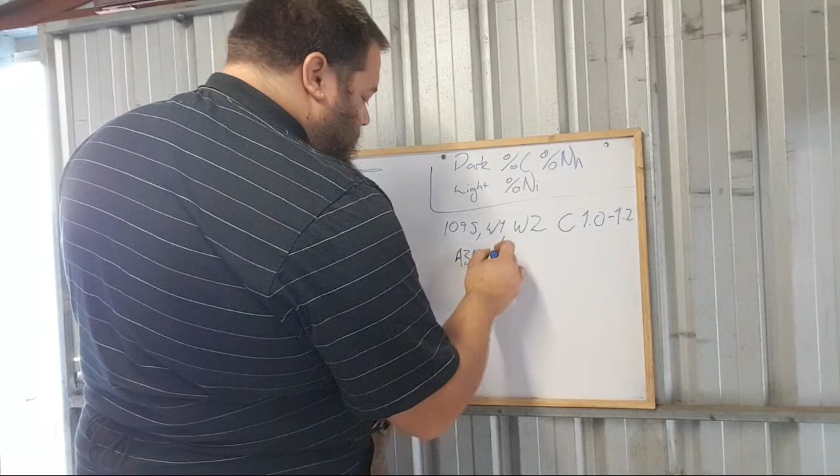Mild steel, so if we're talking A36 or 1018, we're talking about a carbon content of 0.2, or 0.15 to 0.29, well below the hardenability area. So most steels, it is recognized in metallurgical circles that any steel below 0.4% carbon is not what we would call traditionally hardenable. Whether or not they have carbon in solution that can be transferred into martensite doesn't really matter, because the appreciable hardness will not increase across the entire cross-section of material if the percentage of carbon is below 0.4%.

So when you forge, if you've got your file steel, I'm just going to make some teeth in this file steel. I'm going to sandwich that with some mild steel. Let's say we're making a 4-layer billet, so I'm going to make some teeth, and a mild steel bar. Okay, so if this is our billet, our very poorly drawn Damascus billet.

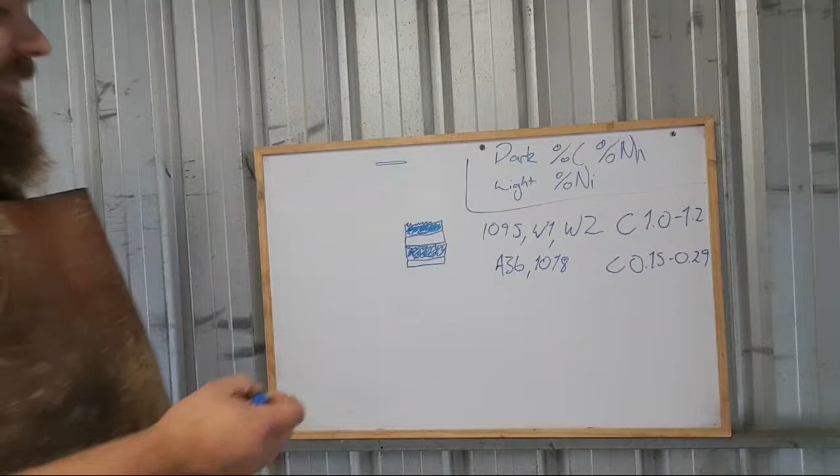So what's going to end up happening is that as we change the cross section, as we forge down on this, the file steel will maintain its rectangular cross section, but the mild steel is going to mushroom out. And so you can see, this is our file steel. And the same thing happens if you use wrought iron in the place of mild steel, especially wrought iron, because wrought iron is very, very soft. So what ends up happening is you have mushrooming, and if you were to turn that 90 degrees and forge it flush, what would end up happening is you'd have your file steel.

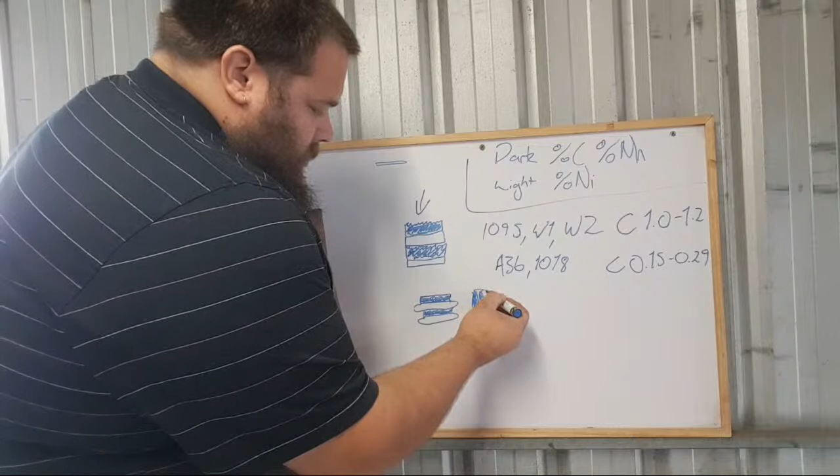So this is your file steel, and then the mushrooming would actually coat the file steel, the mushrooming coming out of the mild steel. And not only that, but you would notice that the mild steel would become much thinner, much faster than your file steel.

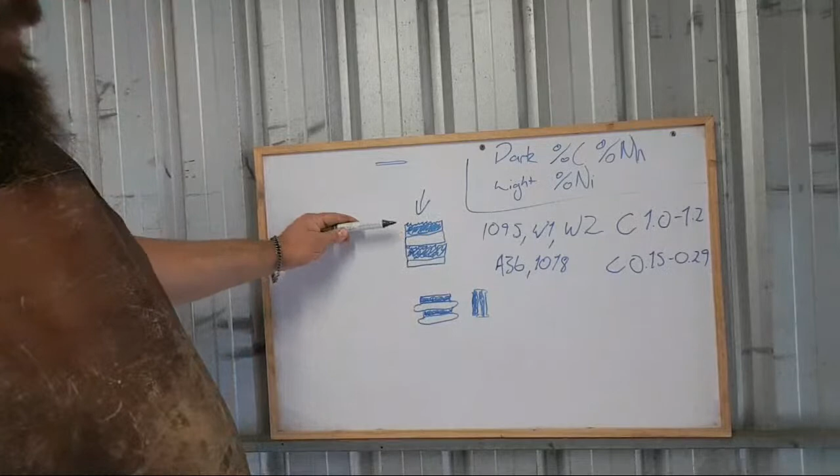So in this case, you'd end up with - if you had equal thicknesses, make believe that these are similar thicknesses - then the file steel would maintain its size while the mild steel squished down. So you'd end up with very, very thin light layers and very, very thick dark layers, purely because the steel is going to move at different rates.

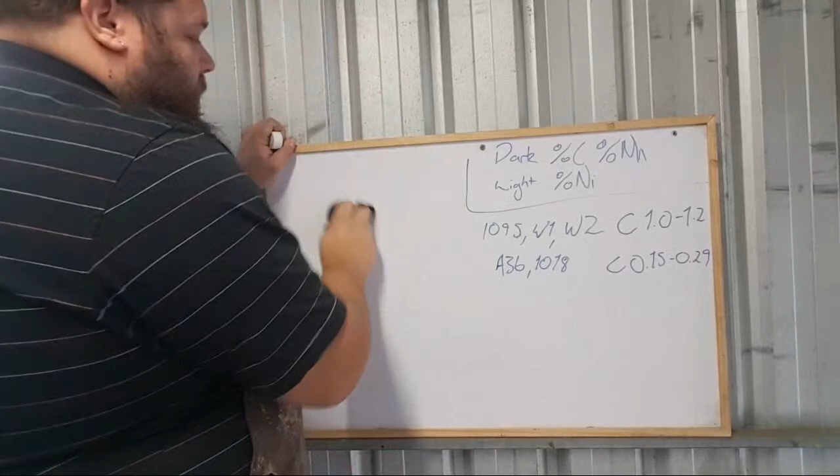So it's important to keep in mind when forging Damascus that you're using chemically similar materials, or if you're not, to keep in mind that they're going to move at very different rates dependent on their carbon content, because the higher the carbon content, the slower they'll move. And then there's also things like the higher the chromium content, the slower they'll move.

As my friend Alex recently found out, 52100, because it is relatively high chromium and incredibly high carbon, moves much slower under the hammer than any other steel he's ever worked with. It's seriously hard stuff under the hammer. So it's really important for you to keep that in mind when you come to forge something. That's why 52100 makes a really good Sanmai, because the central core doesn't move, so it's a lot easier to get the whole thing put together right.

I'm just going to put another screw in this. It's really annoying me.

Now it ain't going nowhere. So yeah, once you've established that you've got your light and dark materials, let's say that we're using 15N20 and 1084.

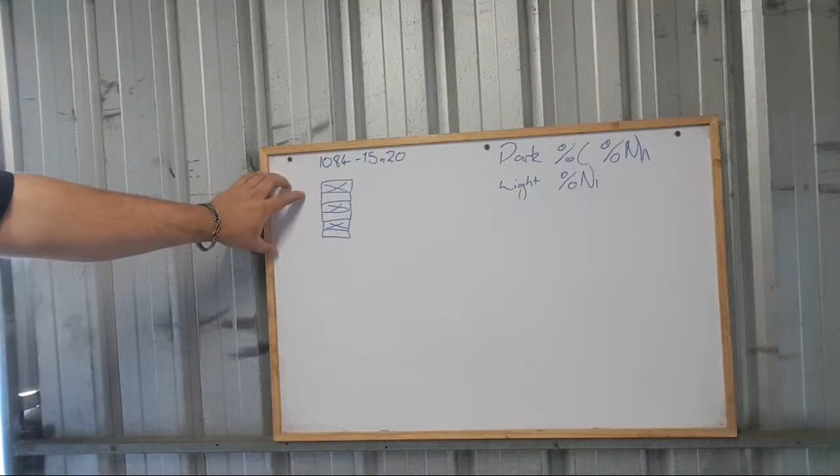So if we were to make a billet, let's say of 1084 and 15N20, so high nickel, high carbon, 1084 being a high manganese steel as well. And we were to layer that up, 6 layers, about equal. 1, 2, 3, 4, 5, 6. The ones with the X in it are high carbon steel. So we've got 1084, 15N20, 1084, 15N20, 1084, 15N20. If we were to forge weld that, now this isn't a forge welding how-to.

I might do one of those in the future, and I'll do that whilst making a billet because I think it'll be easier to explain a lot of the concepts surrounding what happens in the forge weld in that instance. But we're going to take for granted that we can just forge weld anything together we want, and we're going to forge weld these together. We're going to squat them down a little bit, and we're going to create a square. So we're going to create a billet that is, this is a terrible square, but it's going to have 6 pieces, 2, 3, 4, 5, 6. So we've forged it down, we've got our square billet.

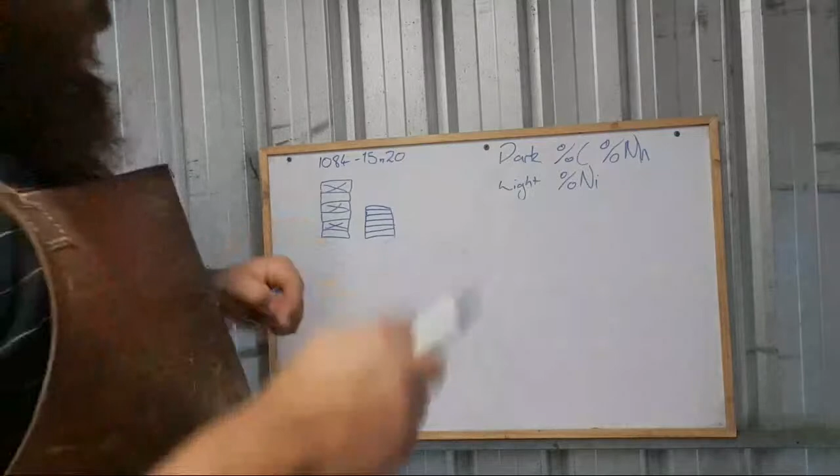Now this is what we would call straight layer or random pattern Damascus. Random pattern can be a pattern that's forged in with the dies and stuff like that to make a random assortment of compressions. But I would still call that patterned Damascus rather than random pattern.

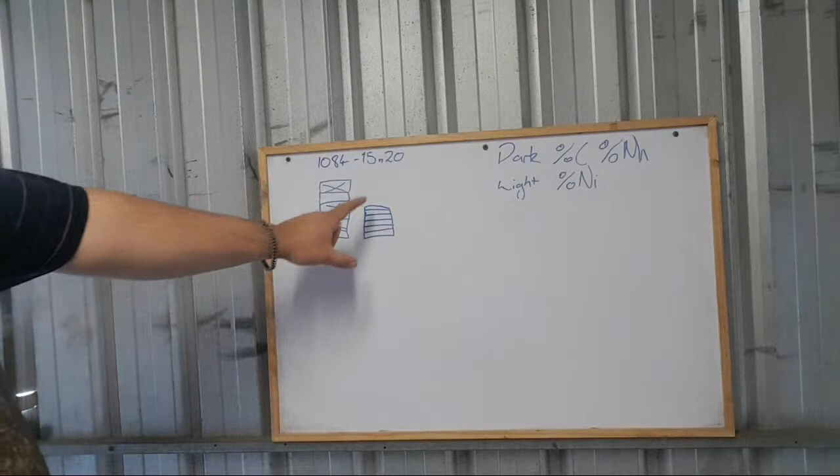So if we have a square billet of Damascus, which is really important for the next step, if we're going to make mosaic Damascus, we want to make something that is going to be tiled and put on edge to show like an explosion. Let's go into an explosion pattern, because this is basically what I'm leading Sean to.

Hey Bobby, Aaron Finn, Westhold Forge. File and leaf spring is a very bad idea. Hey Paul Fontanini. Okay, sorry guys, yeah, the chat wasn't working. Thanks, Wiley, thanks for the test.

So, with the Damascus now established, we have our high carbon, low carbon mix, 6 layers. It's a relatively low layer Damascus.

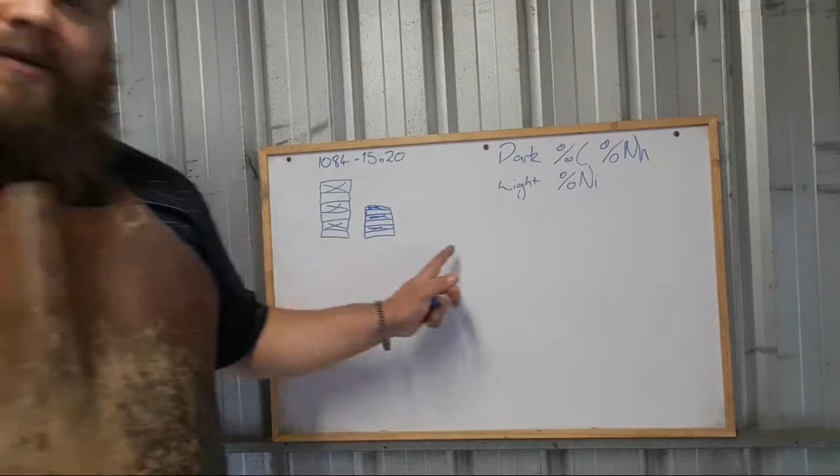All right, Jared, thanks for ducking out, man. Thanks for ducking in, I should say.

If we're going to make W's out of this, which crushed W's is the basis for pretty much every mosaic pattern Damascus. It's not the only start for a mosaic pattern, but it is one of the basic starts. If you're making feather pattern, if you're making explosion pattern, if you're making a lot of other stuff, you're going to want to use crushed W's. But crushed W's are not this straight layer, right?

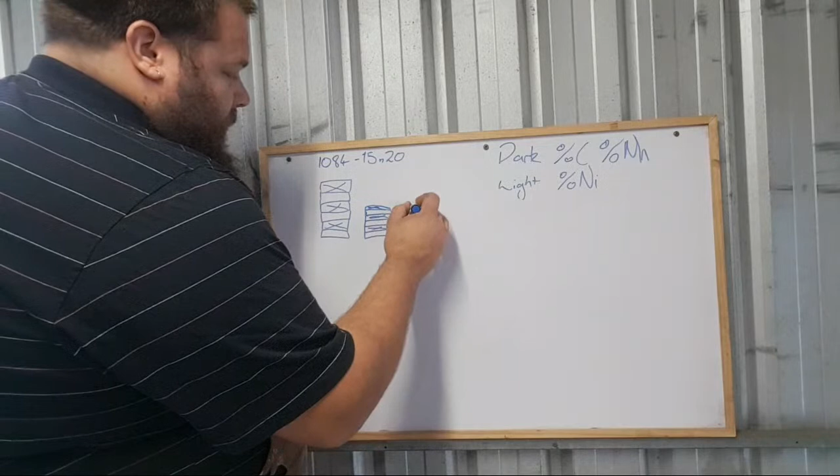If we were to draw this out with the layers running horizontal, what we need to do is turn these onto the 90. But if we're going to turn them onto the 90, we need to first turn them onto the 45. So we're going to make this square like this. This is a diamond, not a square, Sam. You suck.

So we're going to turn it onto the side, and we're going to forge these sides in to create an octagon. Now you're going to watch me make a really shitty octagon, and I'm going to make it way larger than I need to, because drawing an octagon is always fun.

What's going to happen is you're going to actually end up curving these materials like this, and you're going to end up with opposing curves, if that makes sense. I think I put too many lines in there. 1, 2, 3, 4, 5, 6. Yeah, I did. Let's kill that one, and let's just make that a high carbon, low carbon, high carbon, low carbon, high carbon.

Okay, so now we've turned it on its axis and we've forged these in. Those straight layers, when forged on the 45, are going to cup towards the edges. Then when we forge it, rotate it 90 degrees completely and forge it down into a bar cross section, back to like a flat bar like this, what you're going to end up seeing is this.

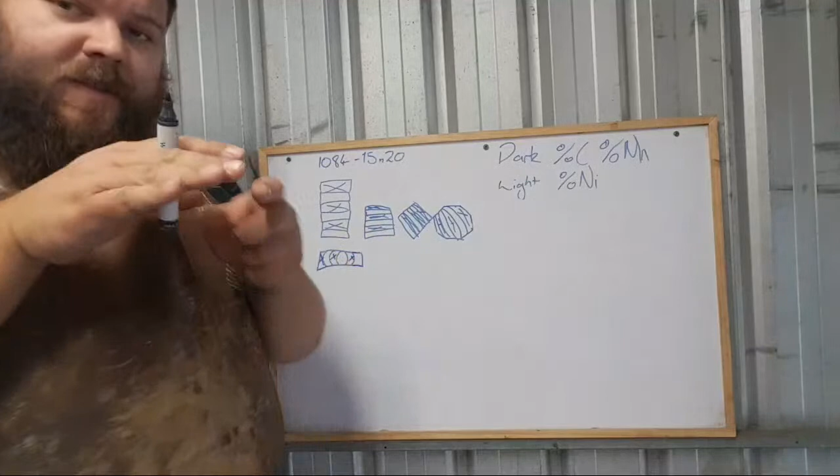Again, I think I drew too many lines in. And so that would be our high carbon, high carbon, high carbon. You see how, because we've cupped the edges in the 45, we now have these kind of C shapes at the ends of the bar. And this is the end of the flat bar we're talking about.

So what we want to then do is, once we've drawn this bar out to, say, 1/8 of an inch or something like that, then what we want to do is then stack this up. So we'd have, let's say, 4 pieces. And each of these, let's say we flipped it. So there's 1, 2, 3.

I'm going to try and match this as much as I can. That's probably a little bit intense. Okay, so we've got our cupped pieces.

What we want to do is etch ends of the bar to see where the pattern is, especially if we've got a low layer even count where there's going to be a high carbon and a low carbon on the outside edges. I'm going to flip it around. So instead of having the high carbon together, we're going to go high carbon, low carbon. You see how that is? So you've got low carbon here, high carbon there.

Thanks, Hans. So yeah, we're going to go high carbon, low carbon, high carbon, low carbon again. And then high carbon, low carbon again here. Did I do that right? Yeah, I did that right. It's fine, I'm just a crappy drawer. So we've got low carbon, high carbon, low carbon, high carbon, high carbon, low carbon, high carbon, low carbon.

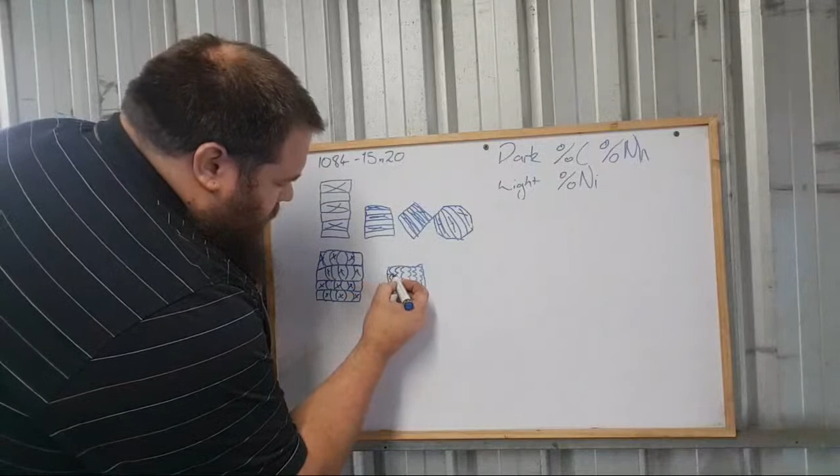And so that's basically what your pattern is going to look like. And that is crushed W's, because if you look closely - if I'm going to draw a blown up view, well, I don't have to, I can just bring you in. Hopefully that's visible. If you look at it side on, you can see W, W, W, W, W, W, W, W.

Damn it, Jim, I'm a bladesmith, I'm not an illustrator. Correct.

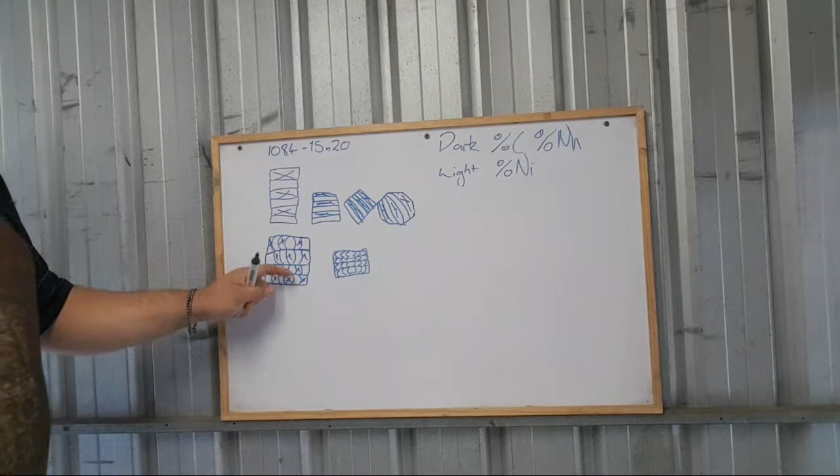So we've gone from straight pattern, turned it 45, forged it into an octagon, turned it 45 again to bring it on edge, and forged the C's, and then stacked the C's and forge welded them together to make crushed W's. Now, the number of crushed W's you have will just depend on the layers. So you could double this again, cut the billet in half and make another layer of W's.

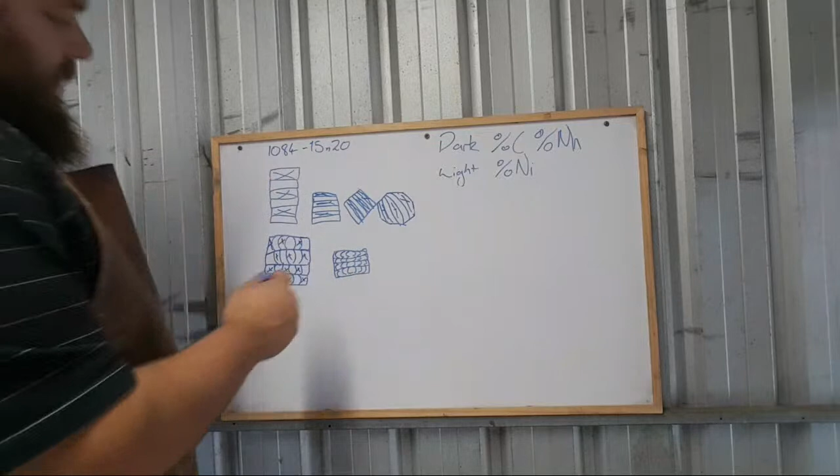And if we were to make a feather pattern, we would take this W billet and drive a wedge, a flat-topped wedge, through the billet to drag those W's down to create those feather-like patterns. But what we're talking about today is not feathers, we're talking about mosaic.

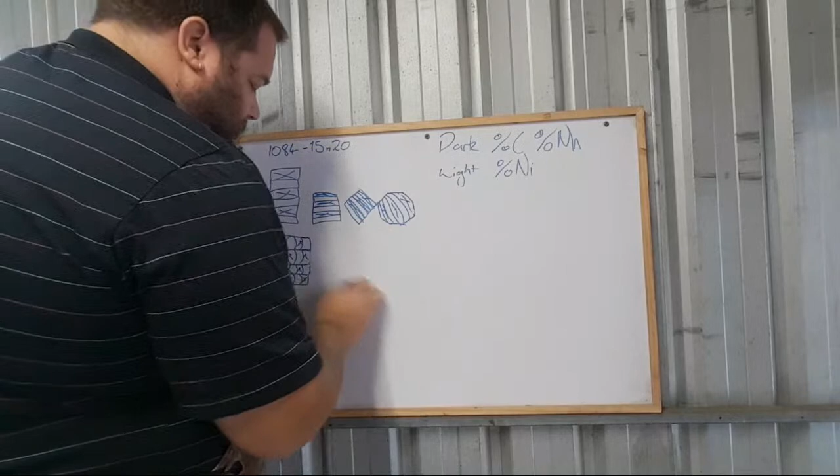So we've already established that W's have been made. Here's our crushed W billet, prepared to be welded. So we weld that up. What we're going to do is exactly the same thing we did here. We're going to forge it on the 45, but in this case, we're going to square it to the 45.

So what we're going to do is turn that billet on its side, or on the diagonal, like this, and we're going to square it to this, so that instead of having the W's running this way, we're going to have the W's running this way. So let's just quickly - whatever. So there's our W's, we've turned them on the 45, and then we re-square it. So then the square becomes this way. Now, what we should have is a square with the W's running like this.

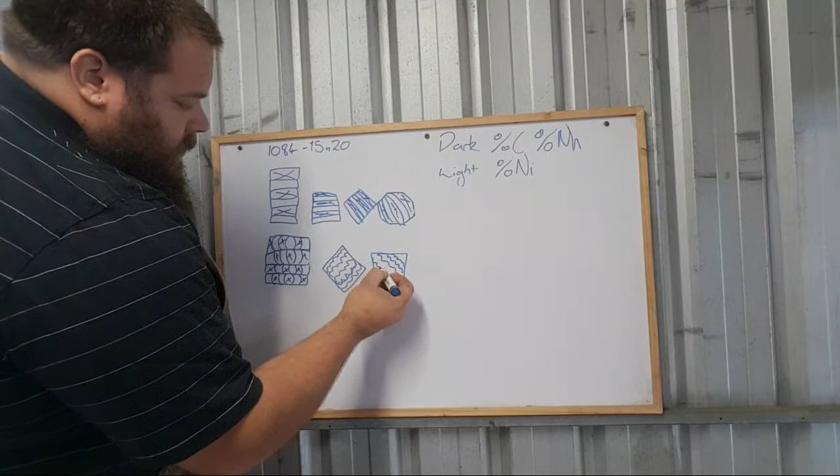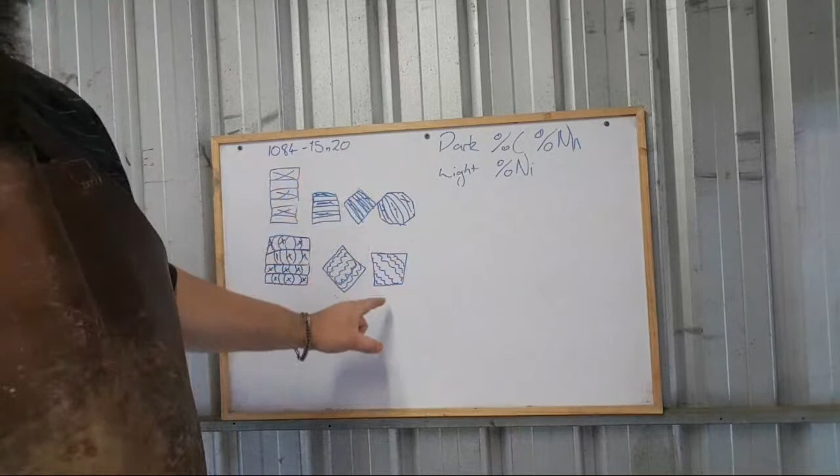So you can see that we've got this kind of lines. Now they will cup slightly, like they did with this forging, but it won't be as dramatic because we've already got the cupping from the W's themselves. So once we forge that, and obviously we wouldn't turn it that way to get this, you see what I mean. But then what we've got is a bar with this being our end pattern.

So what we want to do is cut that bar, hopefully drawing it out to a length. So, say that's the end of our bar. I'm getting fancy here, I'm doing 3D. So that's our square bar, and we have the diagonal W's pattern here.

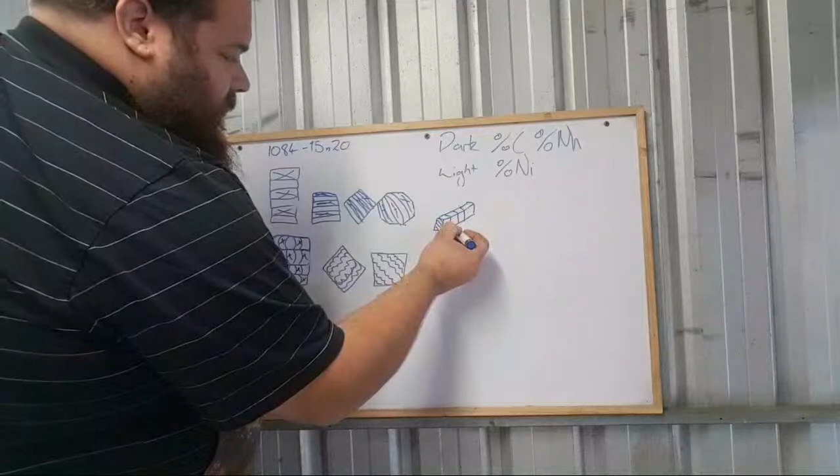What we want to do then is form equal parts, and I know that's not equal, don't challenge me, and then stack them up so that they're in this orientation. Oh my god, that's really not square. Okay, there we go.

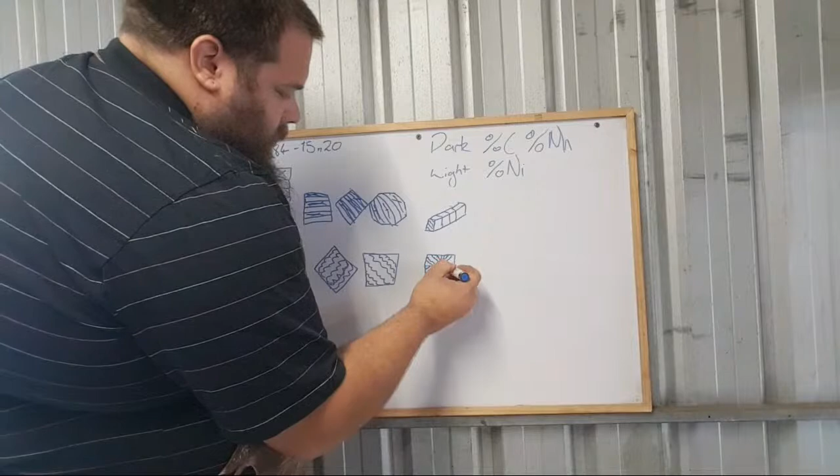Right, so you can see how it's exploding from this. It looks like it's exploding from the center because you have all the lines traveling diagonally outwards. And what you would do is etch the end of each billet to give you the right orientation.

And then you tack weld this up, and you can do it by hand. You need to be working very quick, and you need to forge from both that side and that side. If you have a press, then you can use squaring dies.

So basically you can have two pieces of angle iron on your press dies that create a diamond shape when they're pushed together. You put your billet in there like that and force it all together in one dimension, because that way it'll forge weld all the sides at the same time.

And once you have that, and you've forge welded it, you have the basis for explosion pattern Damascus. Am I making sense so far?

Final photograph, just in case you want to pause it later. Always go back and pause it. I'll leave it up.

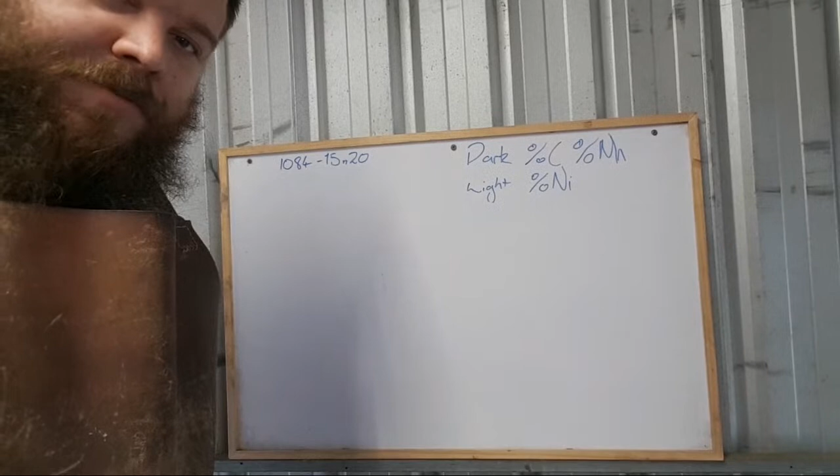So if you want to make just Damascus blades, then you stop at position 1, which was forge welding straight layers together, forging them down into a bar and drawing them out.

Thanks, Shelby. So once we've got our bar, we're going to forge that down into a rectangular cross section. I'm going to make them quite large now, just to show you what I'm talking about. So we're going to forge that explosion pattern down. So it's still our squares, and it's still got our explosion pattern going through it.

And this is how boring it would look if it was straight layers. So you could do straight layers. Keeping them straight after forging them on the 45 is very difficult, but the W's make it much more interesting because it looks like shock waves coming out of an explosion.

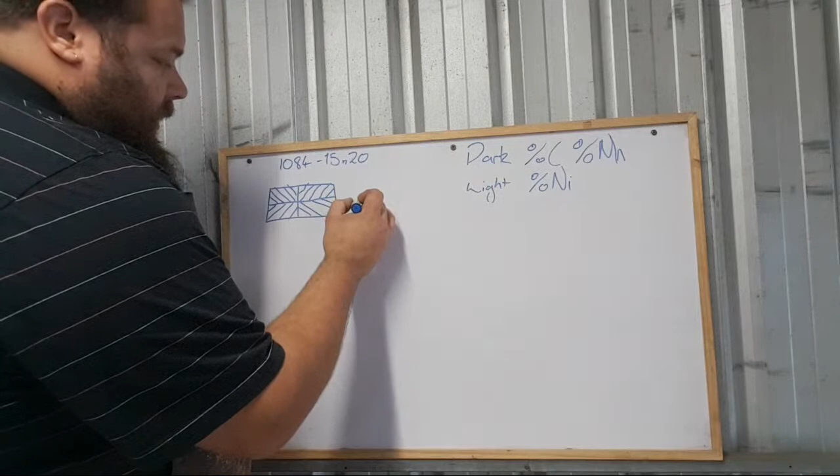So once we have our explosion pattern Damascus, right, we're going to have a long rectangular bar. Again, I'm going to draw in 3D to make my life hard.

What we're going to need to do with this bar is cut it at a 35 degree angle, 33 to 35 degrees. And this is where it becomes really difficult for people who don't have a metal cutting bandsaw or a metal cutting drop saw. If you've got one of those chop saws, it's really useful.

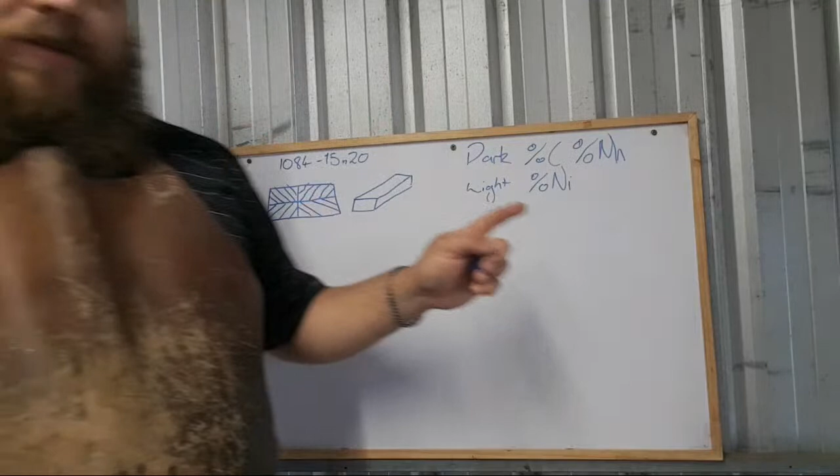If you've got a metal cutting bandsaw, even better. If you don't have either of those things, it is still possible with an angle grinder, and I want to try that one day, but it makes it a lot more difficult. The other thing that is really nice to use for this is a surface grinder or a mill. If you don't have either of those things, it is still possible, it's just a lot harder.

So there are two methods to get from here to having this on the sides of your blade. The first is the ferry flip. So if we are looking at the side of our bar, this is the bar we've got. The end shows the pattern.

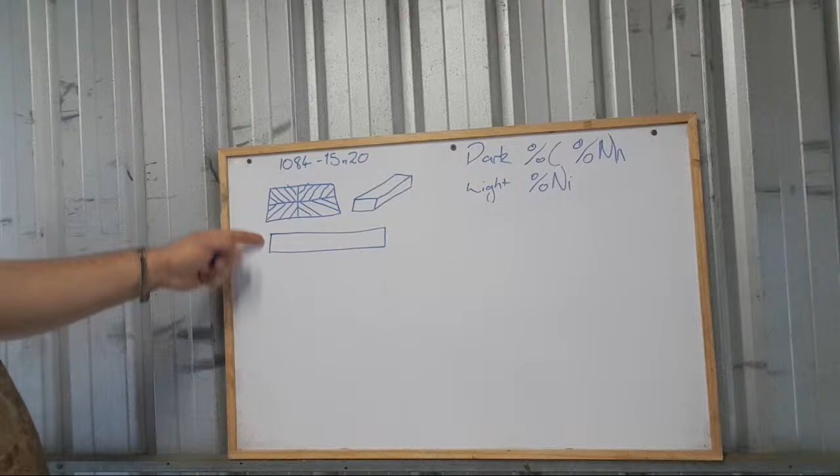So the end, the pattern is here, right? We're going to cut at a 33 to 35 degree angle tiles. I'm going to make multiple cuts, equidistant, try and make them the same size.

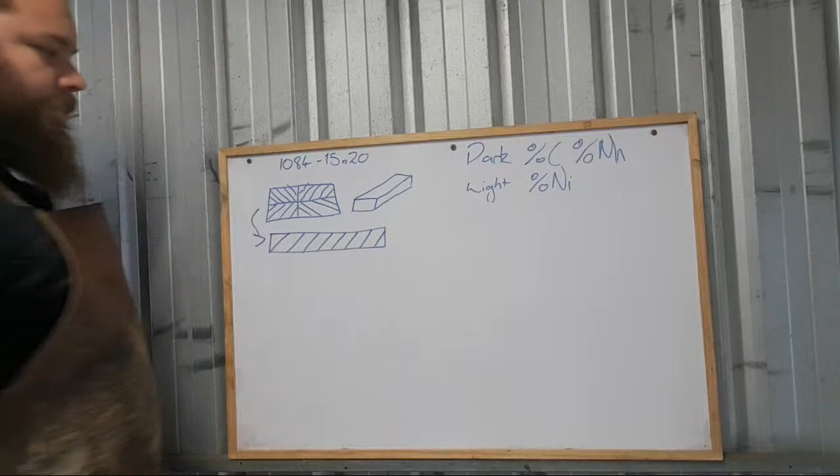And that way, we're going to have this end pattern now being able to be turned this way to make a weld seam.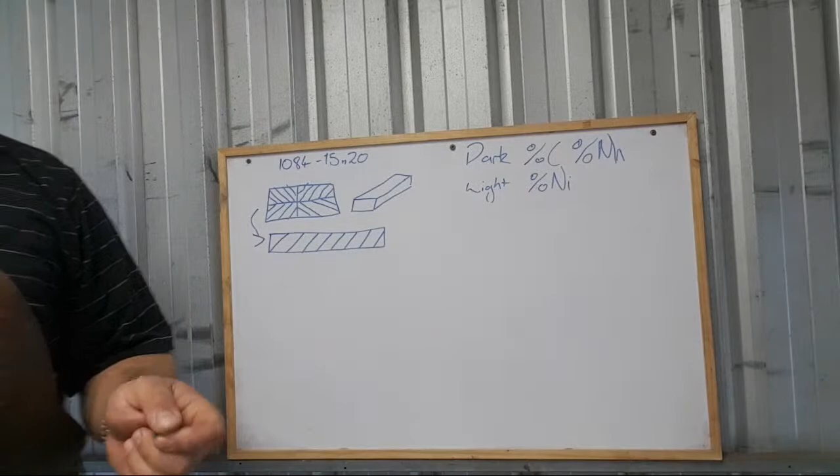Lots lost in kerf, absolutely. Incredibly a lot of loss. And that's why a metal cutting bandsaw is a lot better for this than a drop saw.

Hey, White North. So once we've cut our tiles, you're going to number them 1, 2, 3, 4, 5, 6, 7. Let's say we've got 7 pieces. And we're going to lay them out. We're going to flip one this way, right? So we're going to flip that way and then that way. And then we're going to flip that way and then we're going to flip that way.

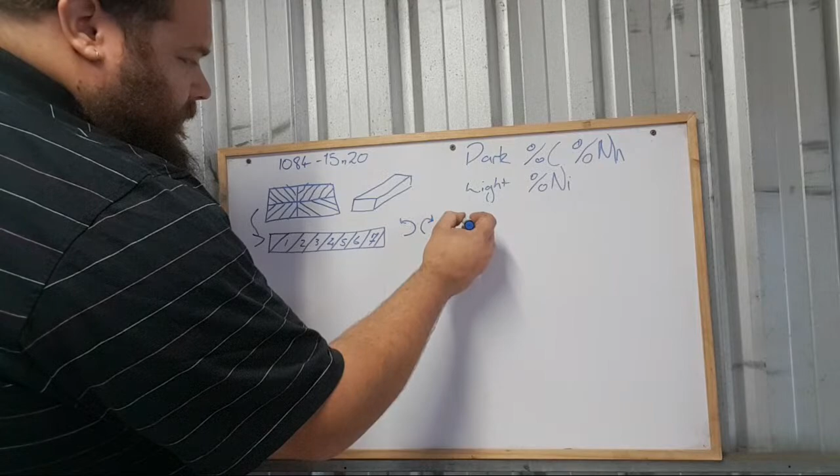And this way, you're going to book match each piece. Kyle does it a really interesting way where he'll go 1, and then 1, 1, 2, etc. like that. And he'll match them that way.

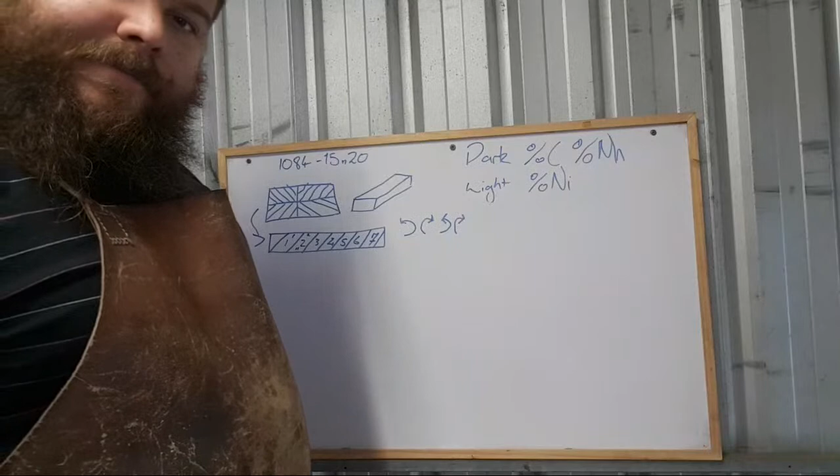Ooh, nice. Milwaukee Portaband and Starrett blades. Very nice.

So you'll flip that one that way, that one that way, that one that way, that one that way, etc., etc., to book match all of the patterning until you have a billet that has a 33-degree angle on it, is straight across, and then there's a 33-degree angle that way. We're going to go 1, 2, 3, 4, 5, 6, 7. And so now what we should have is what was here is now here.

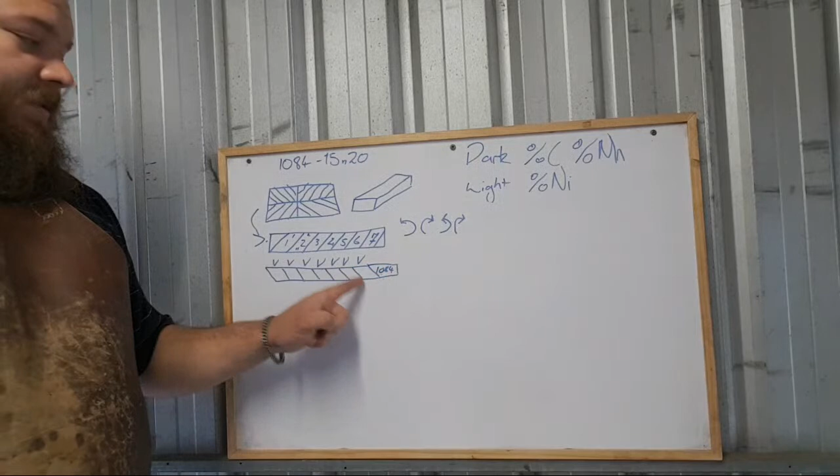And a quick tip, if you're going to do this, is what you can do is make a separate tile back here, one with a square end, out of pure 1084 or 15N20. And that can be your tang, so that you don't lose all of this beautiful mosaic that you just made to your tang. So therefore you have an excess piece of material which is still as hardenable as the rest, but that can be your tang rather than having the pattern disappear into the tang. So the pattern can be all the way along the blade, and you can get a bigger blade out of it as well that way.

So once we've got this, we're going to weld all of the seams. You can do it with a MIG welder, but most people do it with a TIG welder, all of the seams entirely down the entire blade.

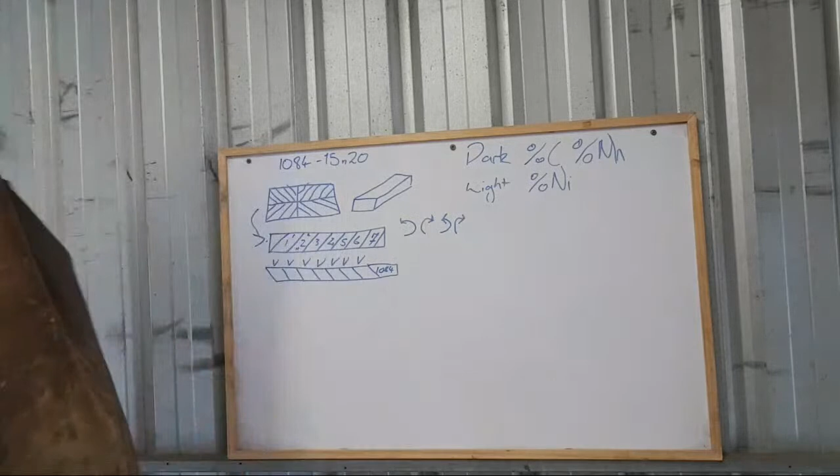You can weld to a bar backing. Some people like to weld all of these to a mild steel bar, like that. And what they do is they clamp them down, weld along the base, and then they weld all the seams anyway. And then you can either weld to that mild steel bar, which normally they do, and then they just grind it off later, or they simply just weld.

They simply paint white out on the bar itself to stop it from welding. But I would prefer to weld to that bar at that stage, because that way I'm guaranteeing that it's going to support that material. So yeah, if you're going to do it this way with the mild steel bar attached, you're going to have less likelihood of shearing these welds in the forging phase.

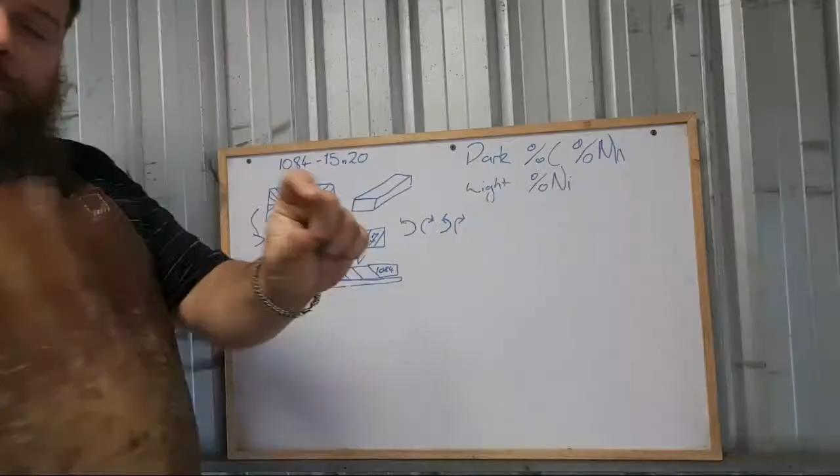And you're only going to want to forge it in this dimension, so make sure you keep it relatively thick. You want to be, I think Kyle Royer has it 3/4 of an inch. His tiles are 3/4 of an inch high, so that would be 3/4 of an inch wide in the cut. You can make it higher, you can make it an inch high. The higher they are, the more welding plane you get, the less likely of shearing. But it'll all depend on how much material you have.

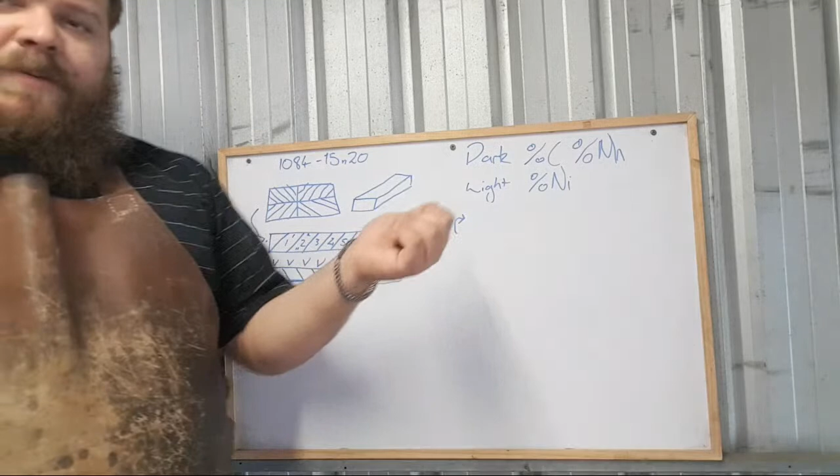Yes, you need to weld all of the seams. It's not a weld that does well with borax, because the flux gets trapped inside these seams, and if the flux gets trapped in those seams, that's it, the weld's gone. Because you're putting a lot of shear stress on this.

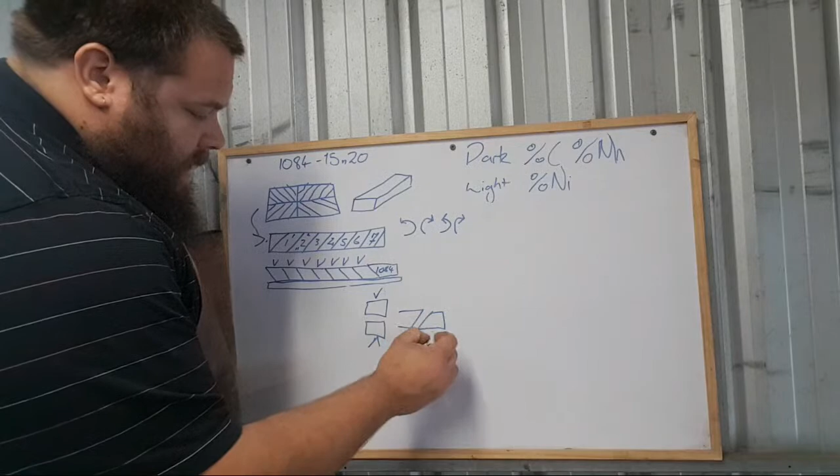In a normal welding plane, you have one piece of material and another piece of material, and the force is directionally this way, right? You're just smashing them together. In this one, you have a piece of material with an angle on it, meeting another piece of material with an angle on it, but the force is still this way. And so what wants to happen is that this one wants to shoot that way, and that one wants to shoot this way. Right, so without having the seams completely welded, A, your shear stress is just going to push them apart.

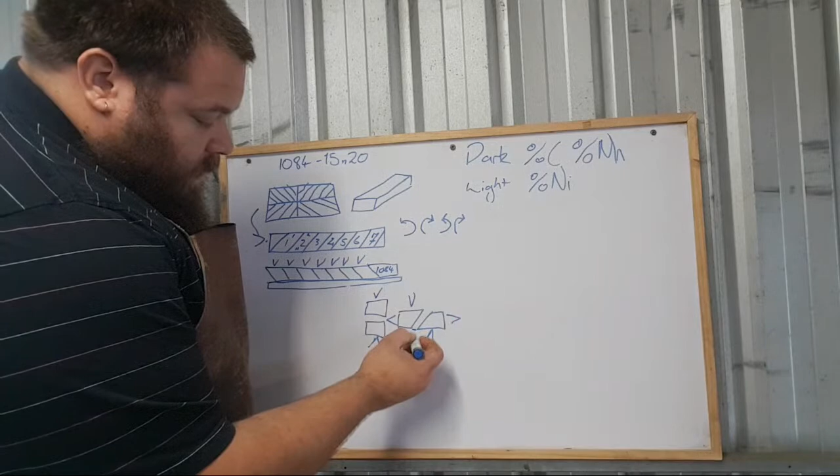And B, any flux that is in here is going to seep into these areas, because what will happen is that as the compression hits, these toes will push apart a little bit and leave you with a seam of borax.

Hey, old wolf, how you going?

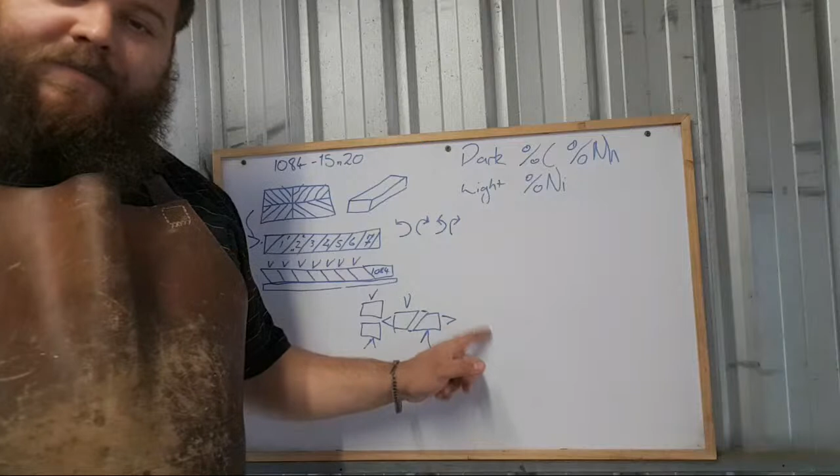So yeah, you definitely need to weld the seams on these kinds of billets. And that's one of the other disadvantages, is then you have to grind out all of the seams, because that weld material is not good for Damascus. But once you've completed that, be back in a second.

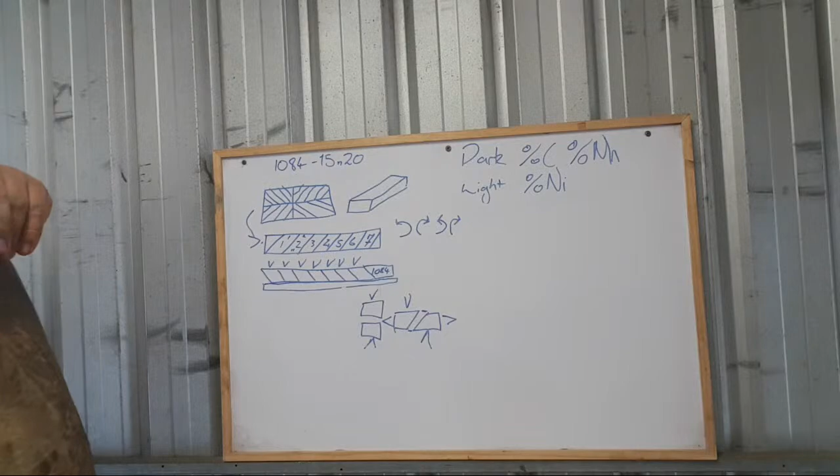So once you've completed that tiling process, and once you've completed all the welding, what you will have is this. So this is explosion pattern Damascus. Hopefully it's clear how those W's make the pattern. And you can see that this has actually been welded onto a piece of 5160 as the tang material rather than a piece of 1084. But 1084 would have been better because 5160 really doesn't like to weld. So yeah, that is the explosion pattern Damascus that we're discussing in this demonstration.

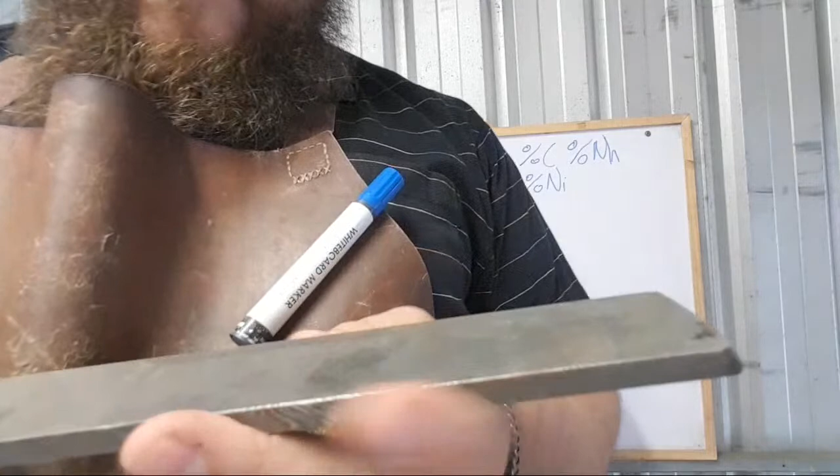Now this is a slight variation on the pattern that I've just been discussing, because this was 4-wayed twice. This has been coffee etched, funnily enough, but it's not hardened, so therefore the contrast isn't very good. That's something to be realized about Damascus, is that the etch doesn't work properly until after the billet is hardened. So that's why people get disappointed when they first trial etch their billets and it doesn't show up as contrasty as what they like.

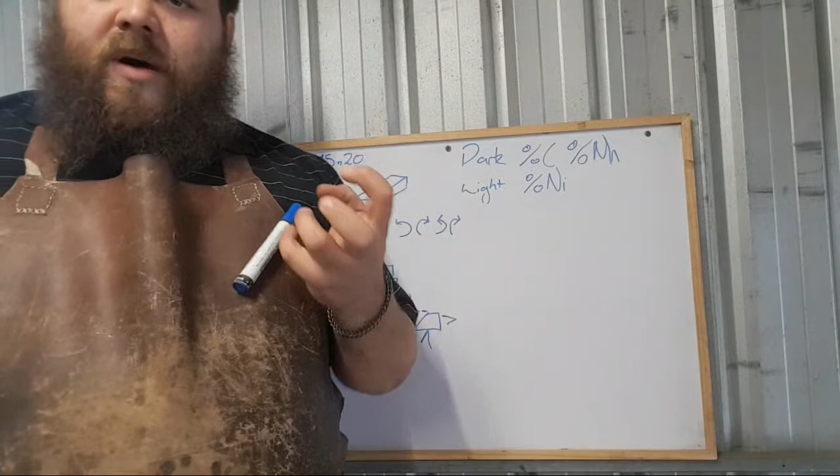So yeah, for those of you who don't know, this billet was actually made by mastersmith Kyle Royer, and what I'm teaching you right now was actually taught to me in a symposium seminar that Kyle did on making mosaic Damascus. So yeah, there's how I know how to do this.

Now, hopefully everyone understands the tiling method.

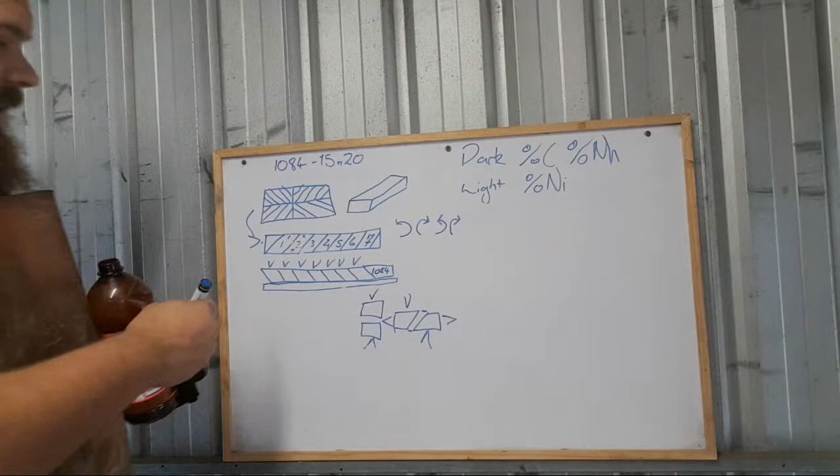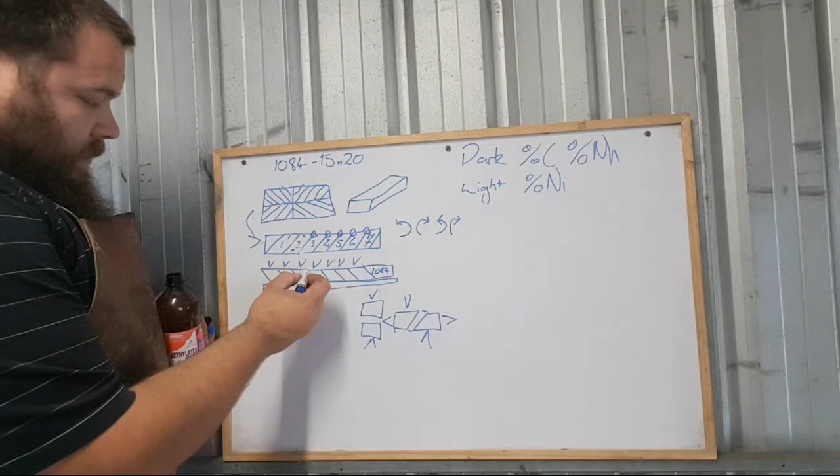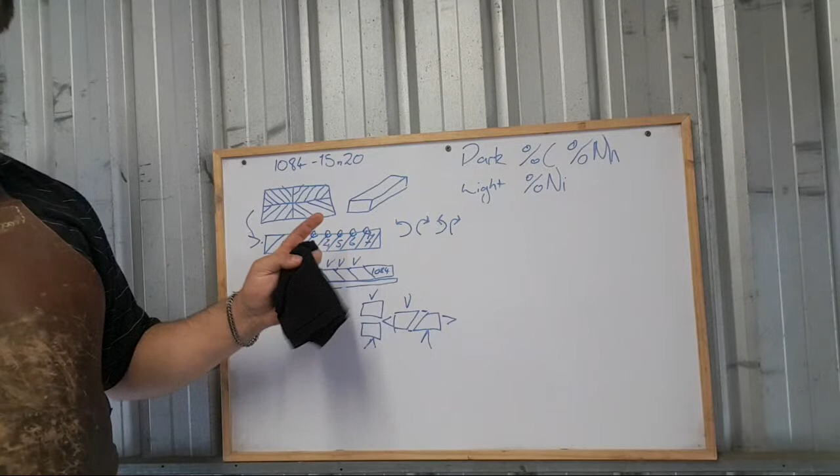Now, hopefully everyone understands the tiling method. This is the method that Kyle uses, and this is the method that most people use. It is sometimes called the Ferry flip or the Felicietti flip. Stephen Felicietti was the man who originally developed this, and he's actually an Australian. He lives in Tasmania, funnily enough. Tom Ferry kind of said that he made up the idea, but he actually didn't. It was Steve Felicietti. And there's been a lot of argument about that. And there are some people in the Australian community that get very upset if you say ferry flip. But either is correct. It is simply tiling, Damascus tiling.

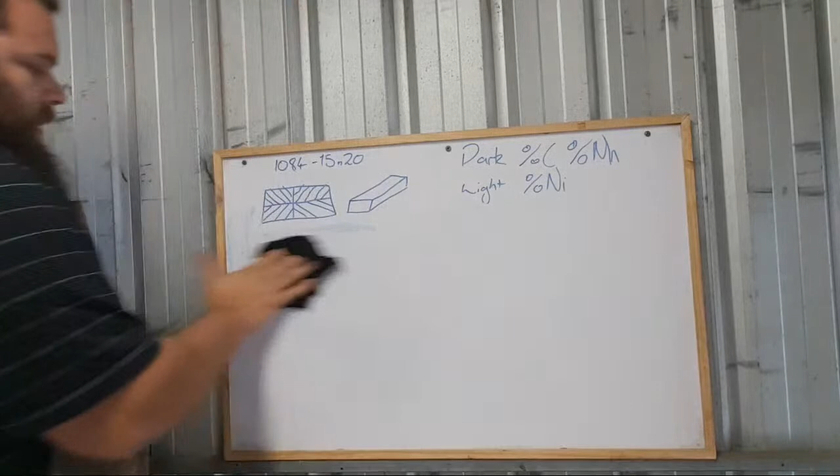So, now, there is a second method, a slightly more dangerous, but also somehow also easier. It puts a lot more stress on your material. And this is known as the accordion cut. Now, a lot of people will know about the accordion cut, and there are two different ways to do the accordion cut, funnily enough. I'm going to show you both.

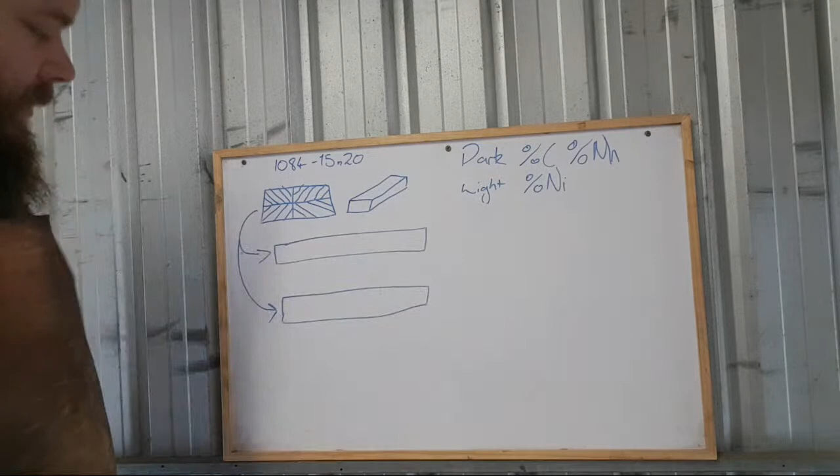So, first accordion cut, we have the same thing. We have our bar, again with the pattern on the end. And I'm going to show you a second bar. And these are both the same bar. They've both got their material with the pattern running in lines this way. All right, so that's the way the pattern is running right now.

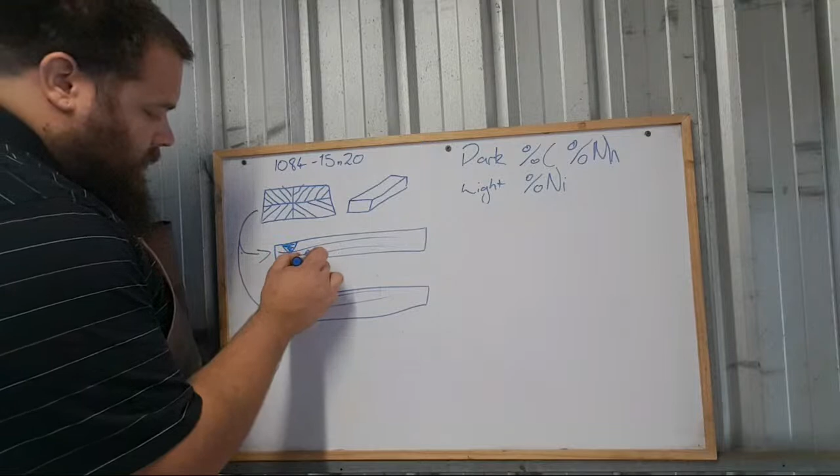Now, the accordion cut has two methods. The first method is called either chunking or triangle cuts. And what you do is actually take an angle grinder or a bandsaw, and you would remove this material along the bar. Equidistant, equal cuts.

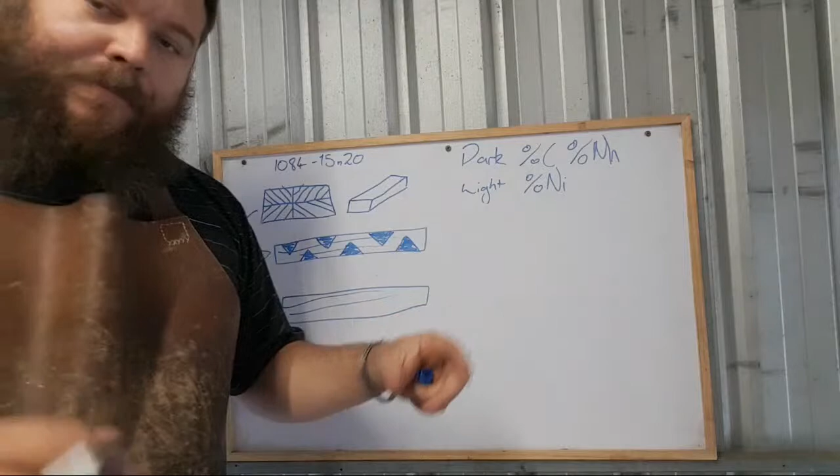So as you can see, you're cutting out material, and that means that in the ends of these cuts, you're going to see that pattern. What you do is cut this material out and then forge it out into your final bar. In that final bar, because you took those accordion cuts out, you'll have spaces along here where you'll have the original end grain.

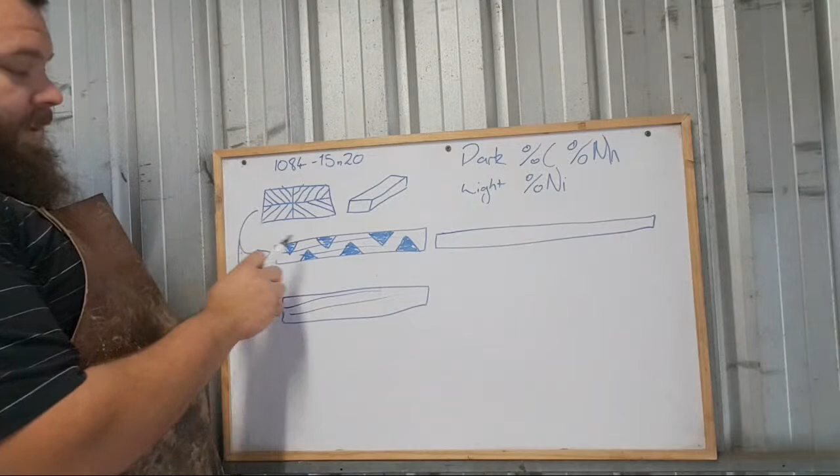Now the difference between the accordion cut and the tiling is that in the tiling, as you can see, the pattern is completely uninterrupted, right? It's completely perfectly repeating.

In this method, if I was to turn the bar towards us, so this is the top of the bar now, we would have a similar thing where we'd have a square of our explosion, and it would be backed up to each other. So we'd have blah, blah, blah, blah, and then we'd have blah, blah, blah, blah.

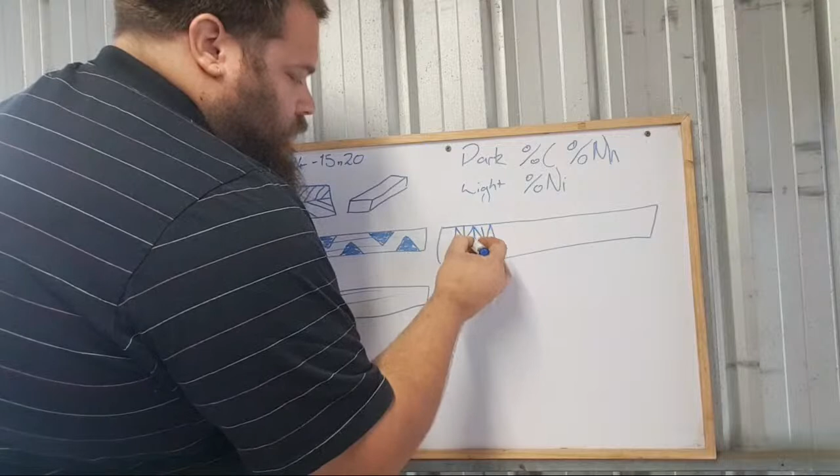Hopefully you're getting what I'm driving at. So this is our pattern. Because we've cut down into it like this and spread it open, we'll get the tops of the pattern. But then what we'll have is a space of just random pattern, and then we'll have that same block repeating, right? So we'll have that same two pieces of repeating pattern.

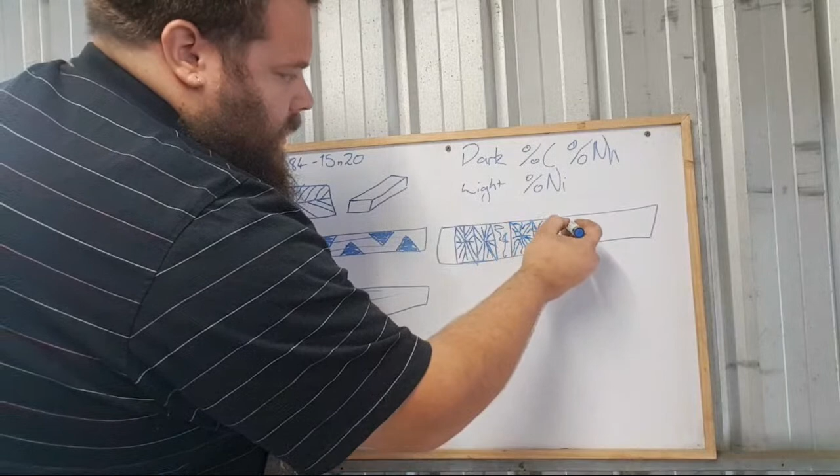And then we'll have another space of random pattern. The reason for that is because you've got to remember that we're going to be leaving this section here to forge down on, right? So this is not going to create an even, uninterrupted pattern like tiling will. It will have explosion, random, explosion, random, explosion, random, explosion, random.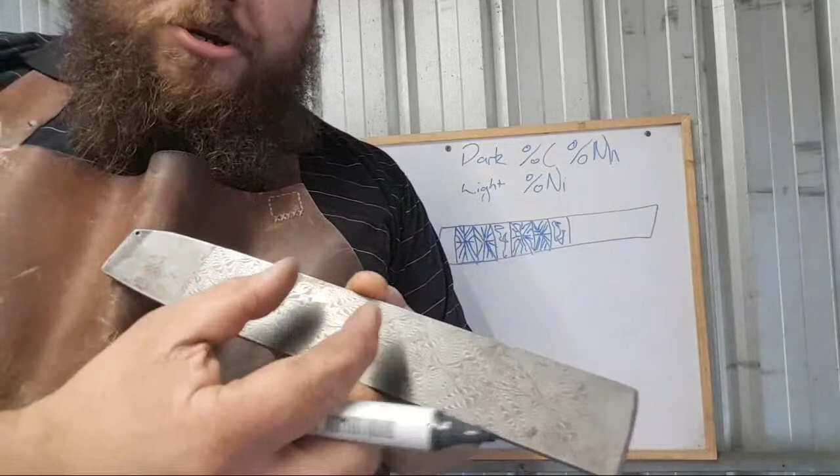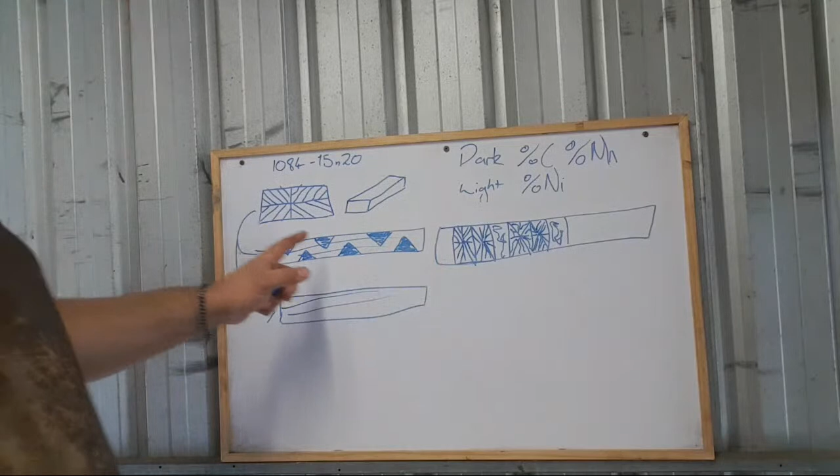Yeah, it's basically a super wide ladder pattern. Now the advantage of this is that you don't have to go through the tiling method. The disadvantages, and there are a couple, is that you're losing a lot more material to cutting out these triangles, because remember, you're losing the size of the kerf, plus you're losing these chunks of steel, right? You could turn these chunks, depending on their size, into other knives and stuff, little baby carving knives. But you also get this interrupted pattern, right?

The second method is basically the same as this one, except you're not removing as much material. Instead, you make vertical cuts. Vertical cut, vertical cut, vertical cut, vertical cut. Opposing vertical cuts. You could do it with an angle grinder, you could do it with a hacksaw. You want to do them to the same depth from both sides. You can see that you've got a line of them coming from the bottom, a line of them coming from the top.

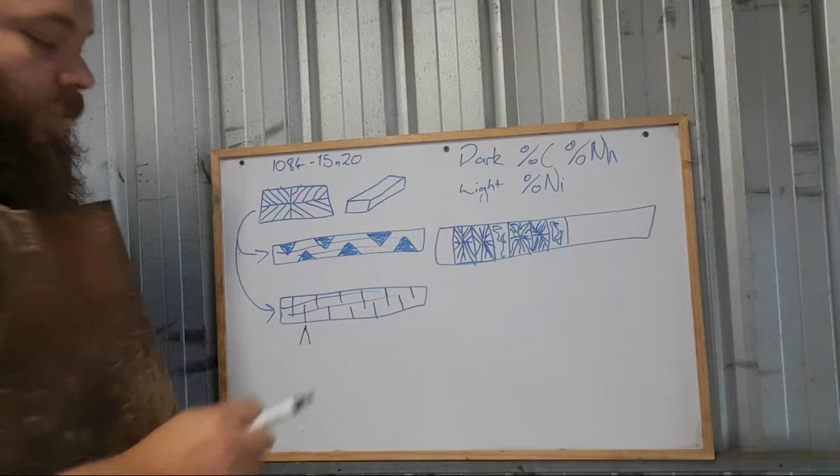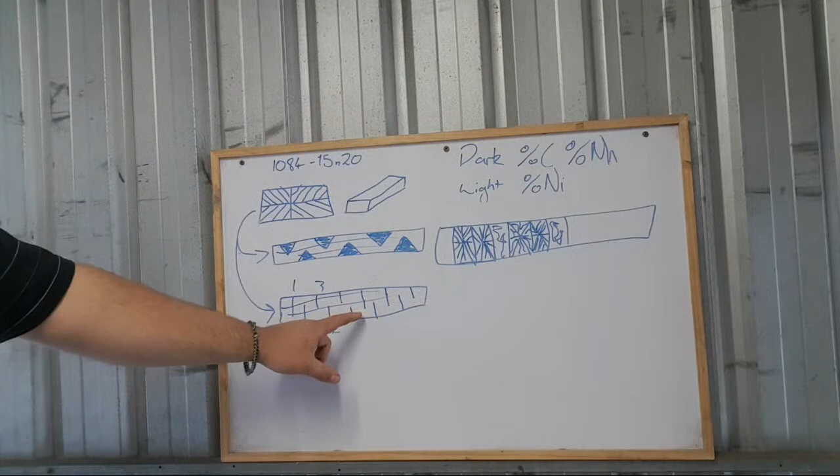And then when you heat this up, you would use a hot cut hardy to drive those open, right? You'd go along, and you want to do this really slowly. You don't want to drive them open all at once. You'd go, you know, 1, 2, 3, 4, along the whole length, using the hot cut to slowly open each individual cut, and you'd go multiple heats getting it out there until finally you'd get to the point where you'd have a very similar pattern to this.

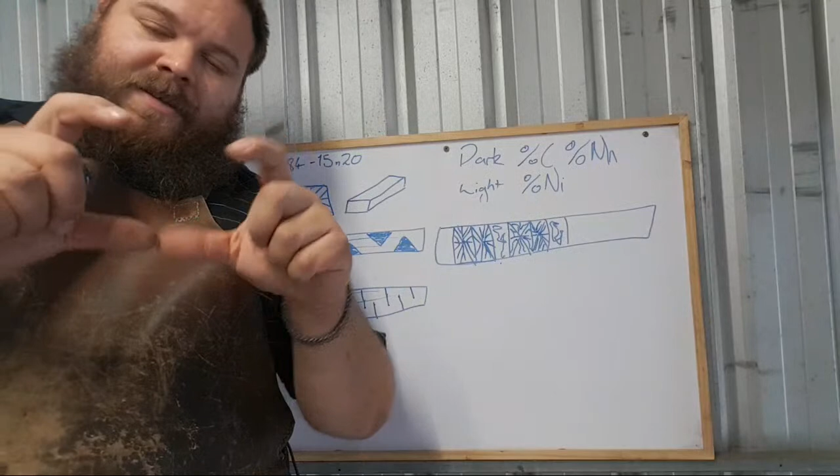But you're losing a lot less material. The disadvantage of this one, and something I've seen mentioned a few times, is you want to drill each end point of your cut. You want to take a high carbon drill bit, a decent drill bit, and drill the end of each cut along that bar to make sure there's no sharp end to the cut that can shear open in the event that you accidentally go too far.

The disadvantages to both of these, although more to this one than that one, is the amount of shear stress you're putting on your steel. So you imagine you've got this really cool box-shaped weld and all that kind of stuff, and hopefully this is all welded up really well. You're then going to be prying on it.

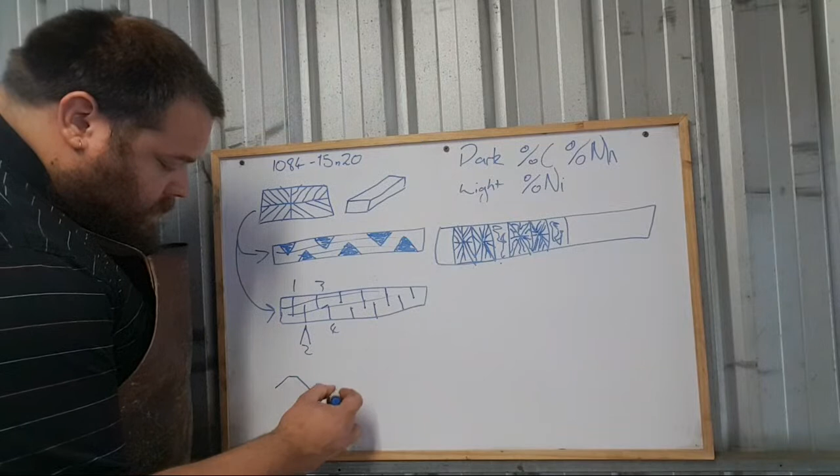And then once you get it to a certain stage, this is eventually going to look like that, right? That's going to be the bar. It's going to be this almost sine wave kind of function. You're eventually going to want to forge that out into a flat bar, which again is going to have those two boxes of pattern, and then nothing, and then two boxes of pattern.

And then nothing. So you're going to still have the same result, except that you're going to lose a lot less material, which means you're going to get a longer bar out of it.

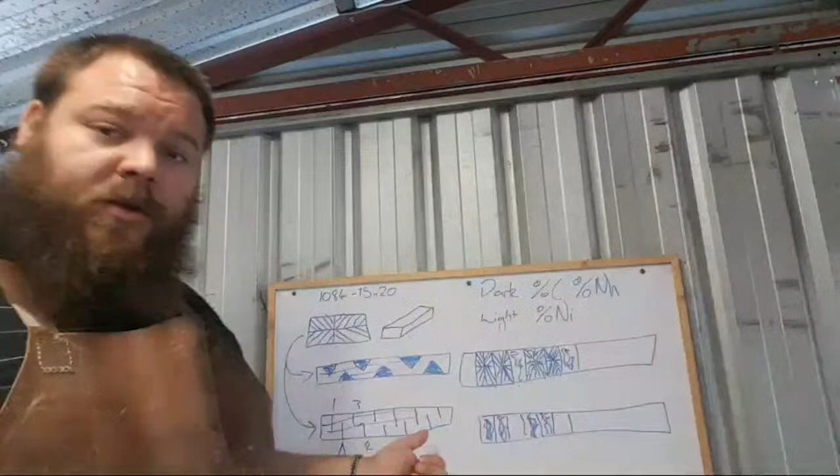So in closing, for this specific material, if I was to do it - because I don't have a metal cutting bandsaw at the moment, or a surface grinder or mill - I would end up doing an accordion cut. I would probably end up doing the chunking method rather than the saw cut method, because I don't really like the idea of the amount of shear stress I'd have to put on it at this stage.

I would probably wimp out and do the triangle method, take my pattern on the side, and just deal with it. No, they don't come out as crisp. The other thing they don't do is get full depth.

So a Felicietti flip - the Felicietti flip allows you to have perfect squares of explosion, right? So you've got perfect squares and triangles and stuff of explosion. What you've got to realize is because you're cutting not all the way through - you can't cut all the way through in order to do this - you have to only cut like two-thirds of the way in.

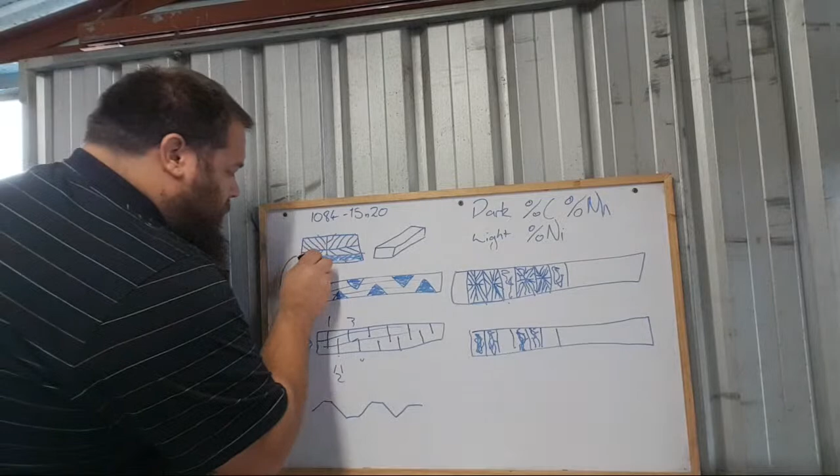You're only going to get two-thirds of your pattern. So imagine, you're only going to get that - you're not going to get the full explosion. You're going to get half an explosion and the tip of the next one if you cut through the middle weld line. So you're only going to get half of the story.

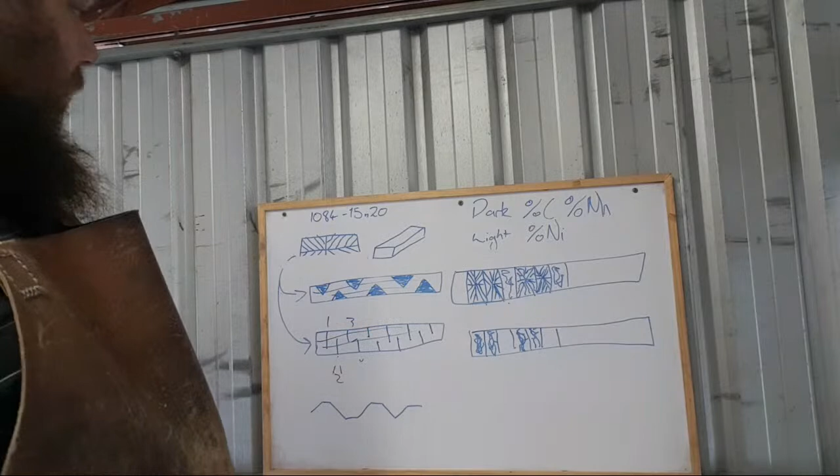But then when you've book matched those, it's going to expand it out a little bit. Depending on how close together you put the triangles, that will depend on how large these random pattern areas are. I think this method would look really good on a sword or a long dagger or a long fighting knife, but on small knives this pattern looks like crap because you can't have a lot of pattern in a small area - you end up with these blank areas. So yeah, that is the basis for how I would do this pattern.

Why not salami slice and forge weld again?

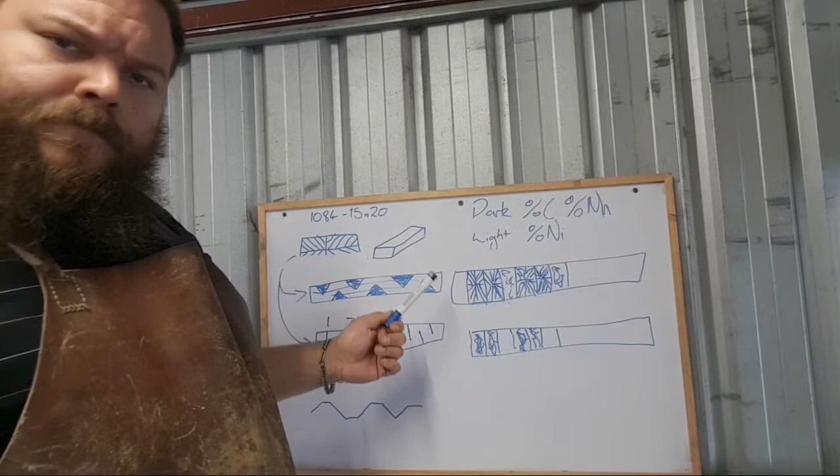Yeah, that last method is pretty much the most efficient as far as material loss goes, but you run a much higher risk of ruining the entire billet doing it, and therefore losing your entire billet - losing all of that material. So you run the risk of doing it that way. And pretty much everyone I've seen that's tried this has lost at least 2 billets out of 3.

Yeah, and low layers do look good. This explosion pattern, I believe, started out as 16 layers. Trying to get the light playing on it properly - that side's a little bit better. There we go. This billet started out at 16 layers, so the layer count goes up really quickly because you're doing those W's and then four-waying it and getting it all together. You're losing a lot of that, but you're gaining a lot of layers really quickly.

But yeah, so for long material, this is a really good way to go because you end up with an interesting pattern, but you also don't have to worry about doing the Felicietti flip.

Salami slice and forge weld - yeah, I'm not sure what you mean by salami slice. Just like, you mean cut the bar into sections and then stack it and weld it? You could do that, but then the pattern is still on the end of the bar.

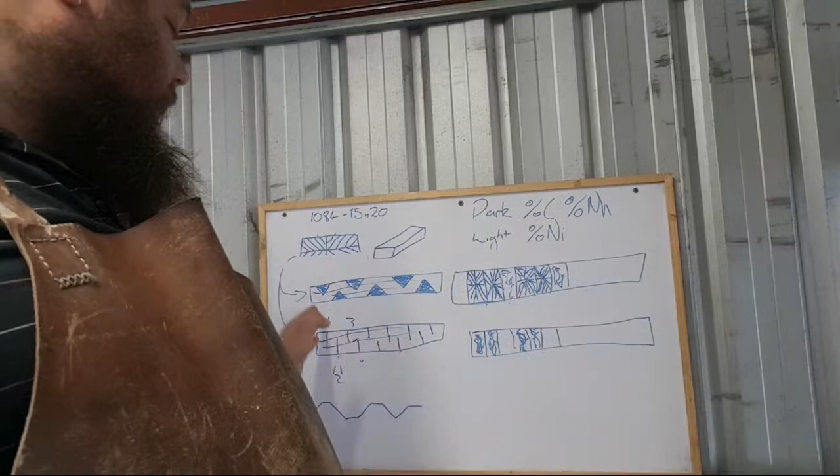There have been people who've attempted to do square welds with this, where they've just cut the bar into sections, flipped them all into a bar this long with the squares, and then tried to put them under a press or a hammer and forge weld them together this way. The problem is that the taller your billet, the more pillar stress you have.

So you end up with a pillar that's going to collapse, and that makes it really difficult to forge weld. That's what a lot of people find out when they do feather patterns, because you need to make the billet quite tall and wide in order to cut the feather. Having anything that's tall and hot when you try to upset it - which is what you're doing when you're forge welding from the top - you end up with a lot of pillar stress, which means the pillar wants to buckle. And if the pillar buckles while you're forge welding, that forge weld is just going to give way and you end up popping the billet in two. I wouldn't advise doing that method. So yeah, I would advise either one of these.

A bologna cut - yeah, so those are the methods I would choose for making a mosaic. Hopefully that was helpful.

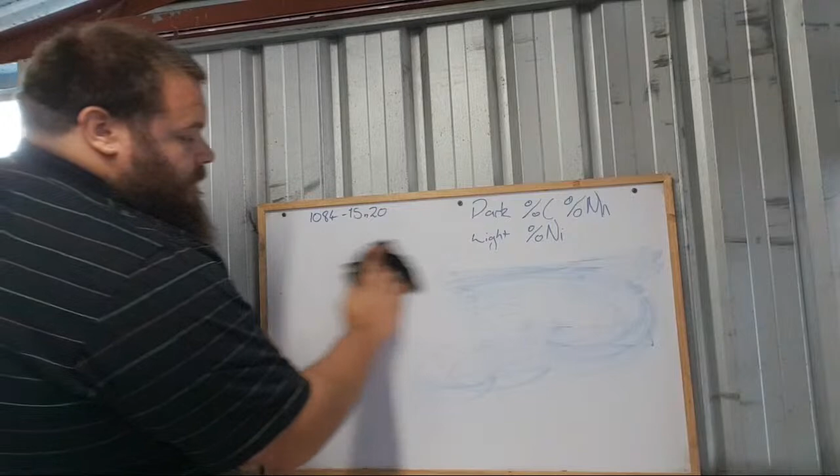And from crushed W's, you can make a lot of different patterns. Now someone asked me if leaf spring and file steel would make a decent pattern. While leaf spring and file steel do etch differently, what they don't do very well is weld.

5160, as a general rule, absolutely hates to weld in Damascus. It's something to do with the amount of chromium and silicon in it. It just hates welding, it friggin' hates it. I can't get it to weld most of the time.

So, yes, but - my advice would be to clean the surfaces really well and seal the billet completely. Do completely oxygen-free, so seal all of the seams to get a perfectly clean weld, because otherwise you're just going to be pushing shit uphill trying to get that done.

Leaf spring steel normally does not like to weld very well. So just take it with a grain of salt.

You obviously can weld most steels, even stainless. Although if you're going to weld stainless steels, you have to completely seal the billet. There is no way to use flux on stainless that will work. Stainless does not weld in an oxygenated environment, even a slightly oxygenated one. It needs perfectly sealed billets.